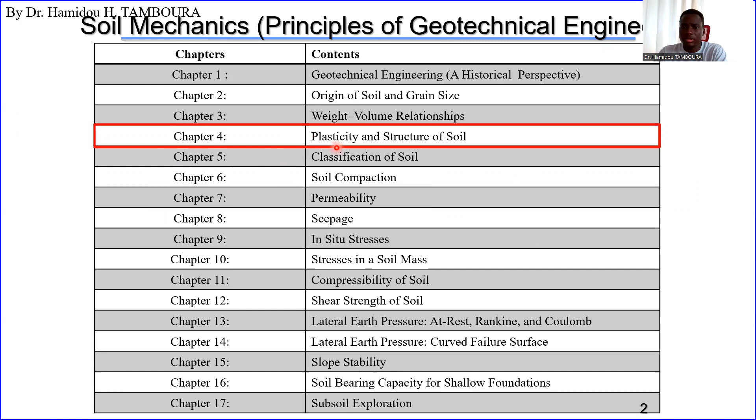In this video, we will start chapter number 4, which is about plasticity and structure of soil. These are the points we will discuss in this chapter, from introduction, point number 1, to point number 8, soil structure.

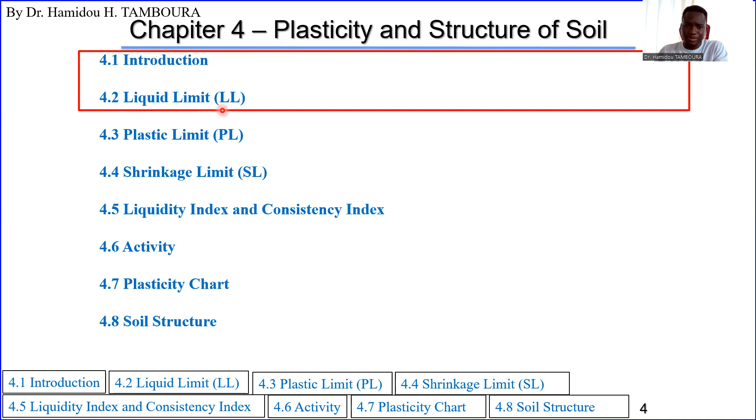For this precise video, we will talk about two points: first, the introduction, and second, liquid limit of soil. We will see what liquid limit is soon enough. Okay, introduction then.

Atterberg limit. Atterberg is the person who worked on this limit of consistency of soil. So he proposed some limits, which we will define very soon, to describe the amount of water of the soil that will change the state of the soil, like from solid to plastic, for example.

So these Atterberg limits are used to describe consistency of fine-grained soil.

If you remember, in the previous chapter we talked about relative density, and we said that relative density only concerns grains, like sand and gravel, this kind of soil. It doesn't concern fine grain, like clay.

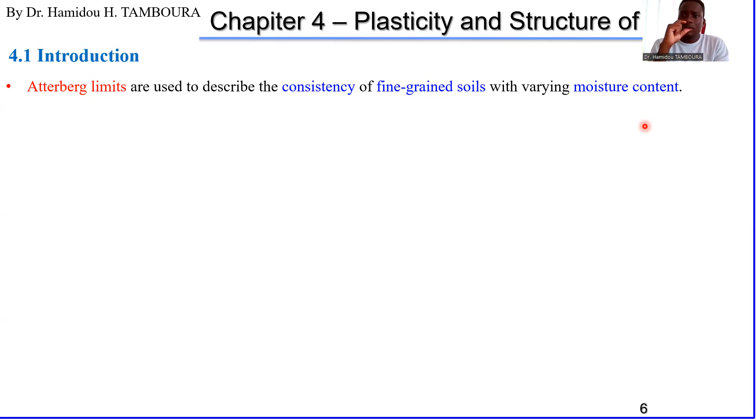Do you remember the formula of moisture content? It's weight of water divided by weight of soil, the solid particle, the solid part of the soil, because soil has 3 phases: solid, liquid which is water, and gas which is air. So weight of water divided by weight of the solid part of soil, that is the moisture content.

So this Atterberg limit includes the shrinkage limit, like solid to semi-solid. If you have a solid soil, like clay, and you add water, at a certain point this solid soil will change to semi-solid. So the limit between solid and semi-solid is the shrinkage limit.

And if you reach the semi-solid state of soil, and you keep adding water, you will reach plastic state. So this limit before reaching the plastic state of soil is called plastic limit.

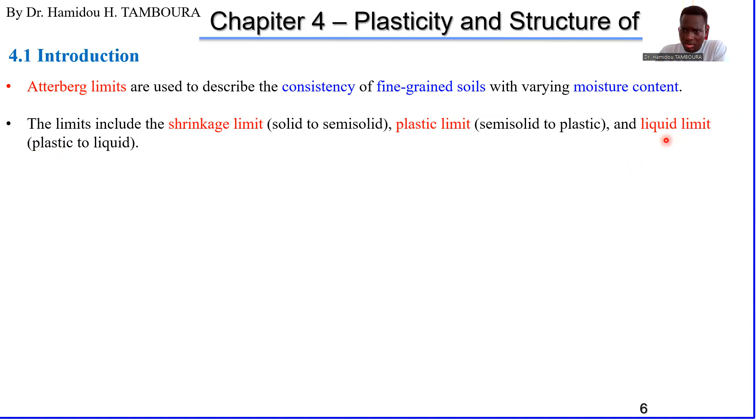And we have liquid limit. That liquid limit is the limit of plastic to liquid. So if you have plastic state of soil and you keep adding water, at a certain point your soil will become liquid. That is the liquid limit.

And if you keep adding water from semi-solid to plastic, you will have another limit, plastic limit, PL. And from plastic to liquid, you will have another limit, the liquid limit. So: solid, plastic, liquid.

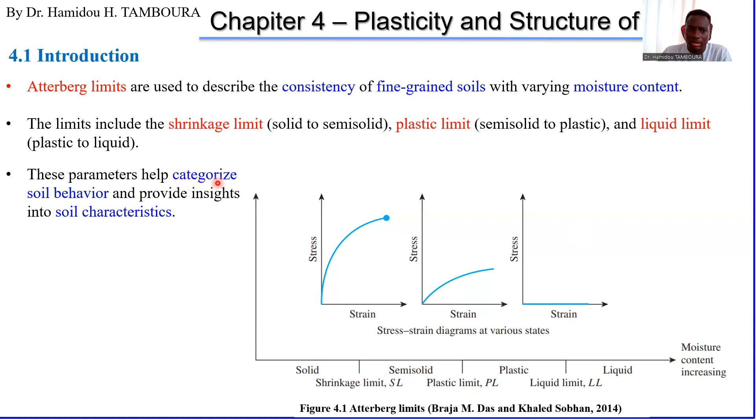So for those who don't understand what is stress and strain, we can explain that later. But this parameter called Atterberg limit helps to categorize soil behavior and provides good information about soil characteristics.

So in this chapter, we will try to explain how to determine this Atterberg limit, all of them, and how this Atterberg limit will also help us calculate some related geotechnical parameters like activity and liquidity index. We will talk about these two later. What is activity of soil? What is liquidity index of soil?

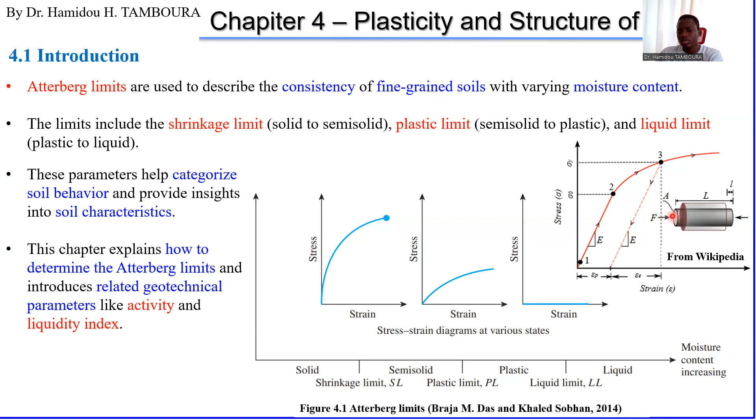So I was talking about definition of stress and strain. This figure can give us a definition of stress. If you have, for example, this original shape of a soil sample, this soil specimen, and you have this section A, which is the area of this soil, and F is the force applied on that area.

What we are calling stress is just the applied force divided by this area. This is just for those who don't understand yet what is stress, what is strain. So stress is just force divided by area.

The area on which the force is acting.

The strain is, when you apply force on the soil specimen or soil sample, the soil will deform. That deformation, small l, divided by the original length of the soil specimen, will give you the strain. So that is the definition of strain.

Now, the capacity of the soil to stand, to resist the stress, that is the strength of the soil.

As you can see here, for example, when the soil has this state, the soil has larger strength, because we need a large stress to cause a small strain. So this soil is strong.

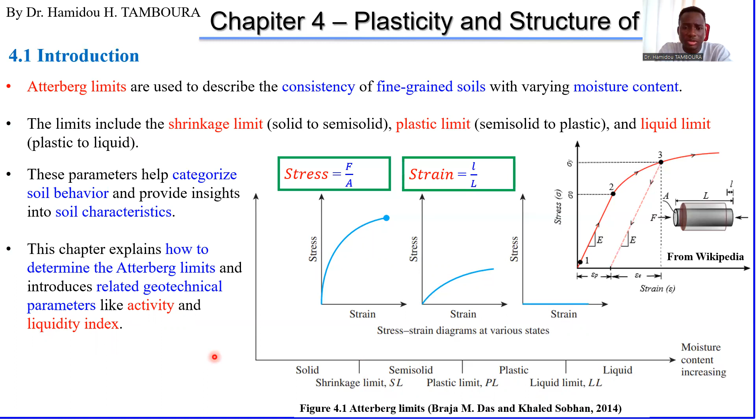Anyway, this chapter is about how to determine the liquid limit, plastic limit, and shrinkage limit, and how we can use these limits to determine the activity of the soil and the liquidity index of the soil. That is the objective of this chapter. Okay, that is the introduction.

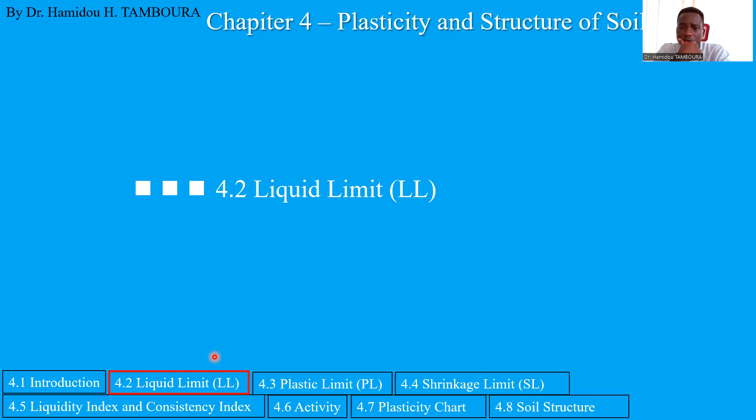Okay, let's move to the next section, section 2 of this chapter, which is about liquid limit. So the liquid limit...

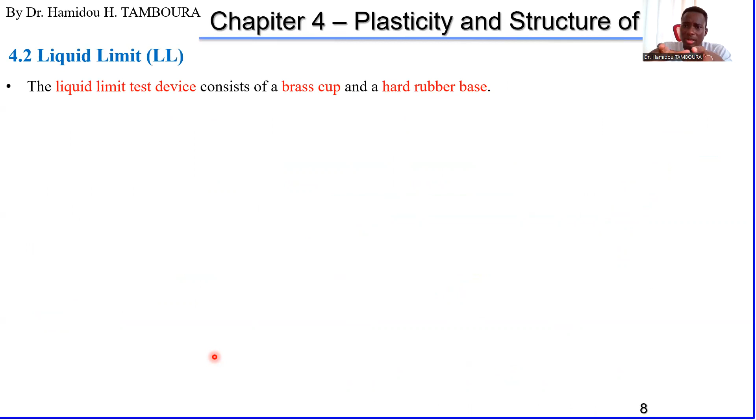is obtained by using a device, the liquid limit test device. It consists of a cup and a hard rubber base, something like that. This is the base, rubber base, and this is the cup.

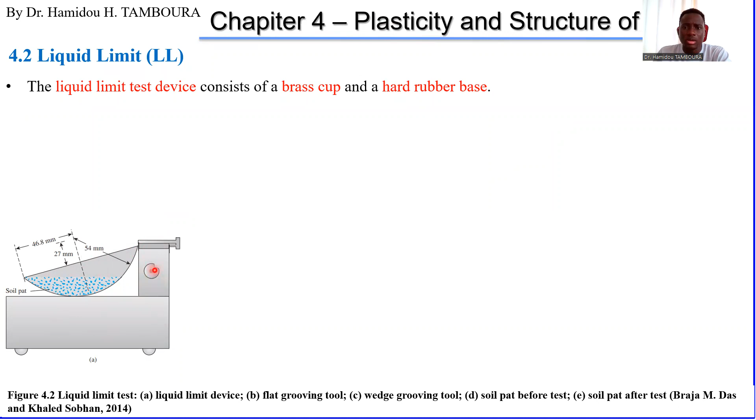So you put the soil in this cup to do the test. We will explain how to perform this test for liquid limit. There is also a handle around here, but this is just a drawing. This is me when I was a bachelor student - this is what I'm holding, this is the handle, the cup is here, and this is the base.

Okay, so to perform the test, the soil paste is placed in the cup. You put the soil in the cup. After placing the soil in the cup, you make a groove in the center of the soil.

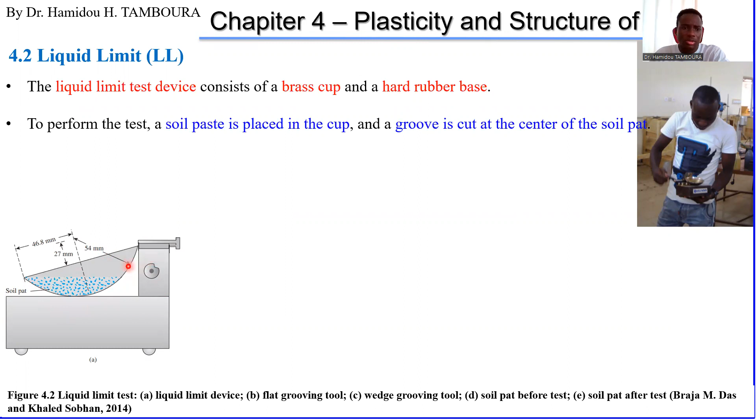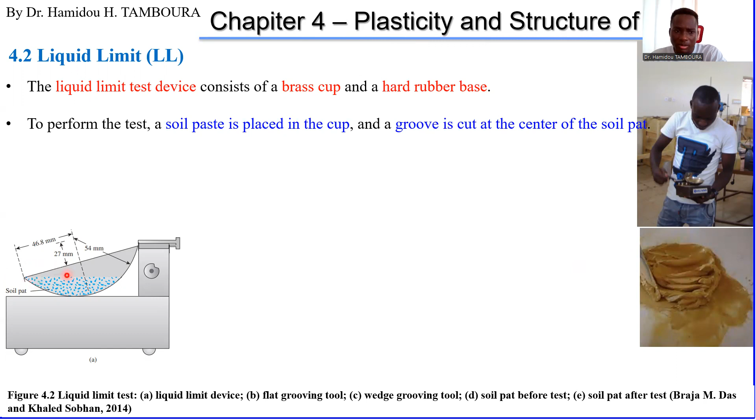Okay, so after making the groove, this is, for example, a photo I took in my lab. You see how the soil is - maybe it's like clay, like a paste. You put it in the cup, and you make the groove in the center of the soil.

These two are the tools for making the groove. There are two types, this type and this type.

After making the groove using this tool, you then lift the cup and drop it. That will cause the flow of the soil. By doing that - you see the handle I am holding here - if you turn the handle like this, it will lift and drop the cup. This part will drop on the base, the rubber base.

And by doing that, you will see the groove you made in the center of the soil will start closing, it will be something like that. At the beginning, you will have something like this, making this groove. This is, for example, a section view of this cup, and you can see the groove made by using this tool.

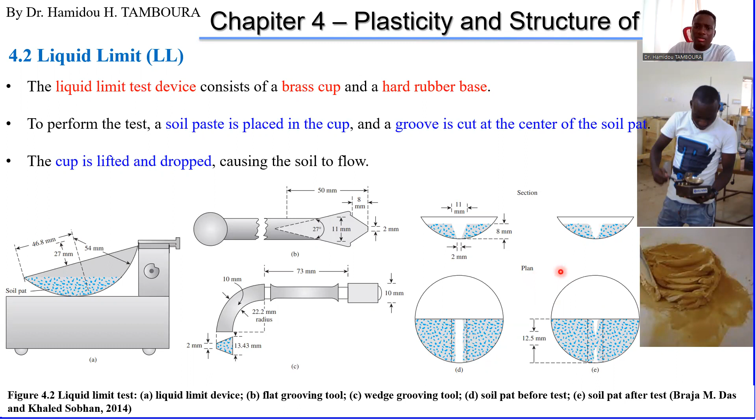After dropping many times, several times, the cup on the hard rubber base - okay, so what is now the liquid limit?

How do we find the liquid limit? Okay, so the soil water content, moisture content, required to close this distance of 12.5mm, just this distance, along the bottom of the groove after 25 blows, is defined as the liquid limit.

You see, for example, this soil here, this mixture of clay with water, we can determine the water content of this soil. You know the formula: weight of water divided by weight of solid particle. Okay, then...

If we use this soil, put it in the cup and drop, make the groove and drop it 25 times, 25 blows, 1, 2, 3, up to 25, and the groove closes, then the amount of water in this soil is the liquid limit. This is how it works.

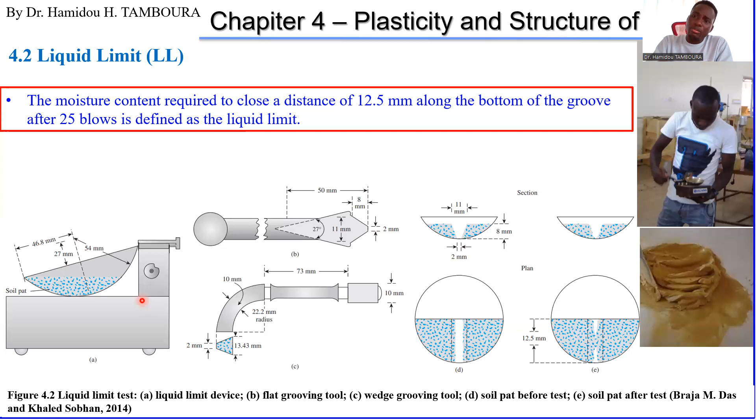So on the contrary, if the soil is too dry, you will drop the cup maybe over 30 times before it closes. The groove closes, means not much water. Soil is almost hard, almost solid.

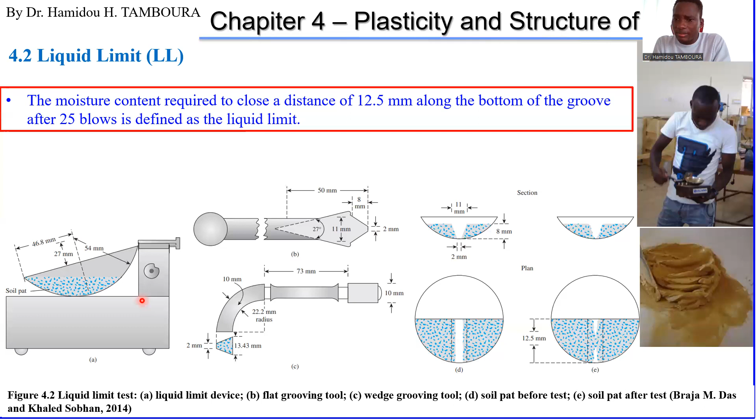Okay, so it's very difficult to make the mix of water and soil and have the water content that will close the groove at exactly 25 blows, dropping the cup 25 times. It's very difficult to obtain that at only once. So for that, people did a lot of tests. You have to do several tests before determining this.

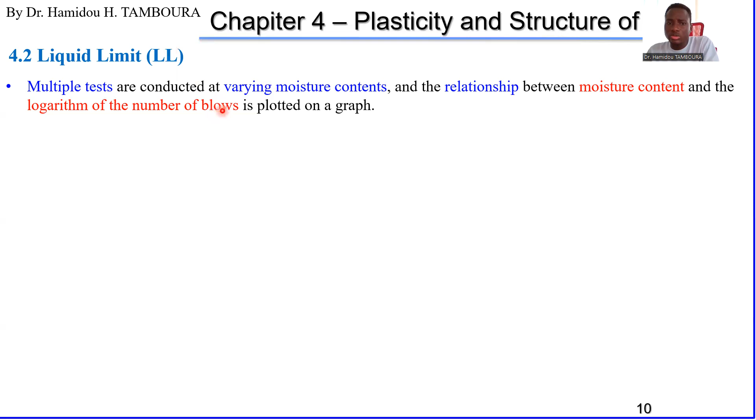So people did a lot of multiple tests and tried to estimate the relationship between the water content, moisture content, and the number of blows, actually logarithmically. And they proposed...

...this kind of method. So now in the lab, people are doing this every time. You do a lot of tests, at least 3 actually. Each point represents one test - 1 point, 2 point, 3, 4. So at least 3, and manage that of the 3 points, at least one has the N value higher than 25, and another one has the N value less than 25.

So this water content is the vertical axis, and the horizontal one is number of blows. But don't forget, here is log scale. After doing that, plotting the points, you can just draw this kind of curve.

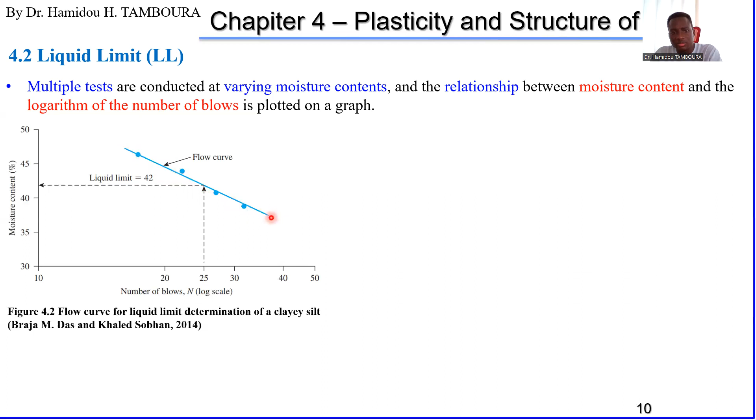So as I was saying, at least 3 tests for the same soil are conducted by changing the moisture content, the water content. You change the water content and you do the test. Or sometimes you just use the same soil - at the beginning you put too much water, and in time, the water will evaporate and the amount of water in the soil will decrease, and the soil will become little by little solid. So during the solidification of the soil, you will have at least once the liquid limit you are searching for.

No, at least three tests with varying the water content. So this curve - just an estimation. This curve is called the flow curve - the flow, how the soil will flow to close the groove made in the center.

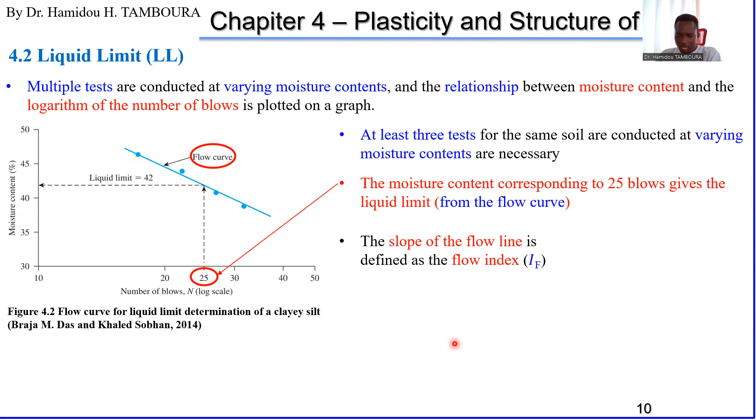The slope of this curve, this flow curve, is defined as the flow index, which can be obtained by this formula: IF equals W1 minus W2, divided by log of the ratio of N2 to N1. W1 and W2 here are the water content of soil in percentage. N1 and N2 are the number of blows corresponding to W1 and W2.

Here is W2, okay, it's just a mistake. So as you can see here, the W1 and W2 are exchanged so that we can obtain a positive value, because as you can see, the slope of this curve is negative.

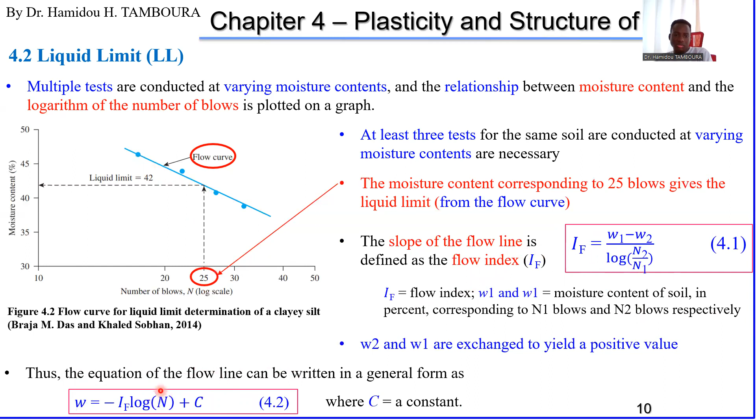So after that, then we can say that the equation for the flow line, this line, can be obtained with this relation: water content is equal to minus IF, IF is the index, the slope, the flow index, log N plus C, and C is just a constant.

I will just skip this figure here. We will use it again. So,

US Army Corps of Engineers propose an empirical formula to determine the liquid limit. They say liquid limit is equal to water content Wn, times the factor of the number of blows N divided by 25, raised to the power tangent beta. N is the number of blows that will close the groove.

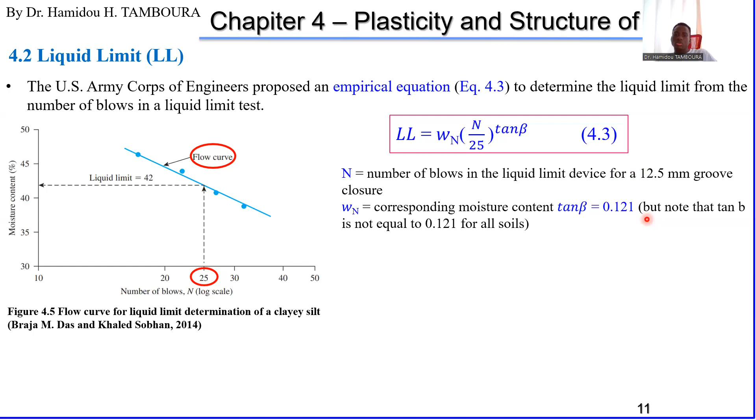And Wn is the water content corresponding to that number of blows. The tangent beta is estimated to be 0.121. But this value of tangent beta is not true for all soils. Some soils, this value doesn't work.

So this equation is working for N value between 20 and 30. And the formula is known as the 1-point method and is adopted by American standard.

This means that you do only one test. By doing only one test, you can use this formula to obtain the liquid limit, because previously you needed to do multiple tests before you determine your liquid limit. By using this formula, you need only one test. Only 1 point is necessary.

So you put water in the soil, you know the amount of water you used, meaning you know the water content, and you do the test. The number of blows you obtain, if it falls between 20 and 30, then it's good. You can use this formula directly to obtain the liquid limit using the water content of the test and the number of blows you have obtained.

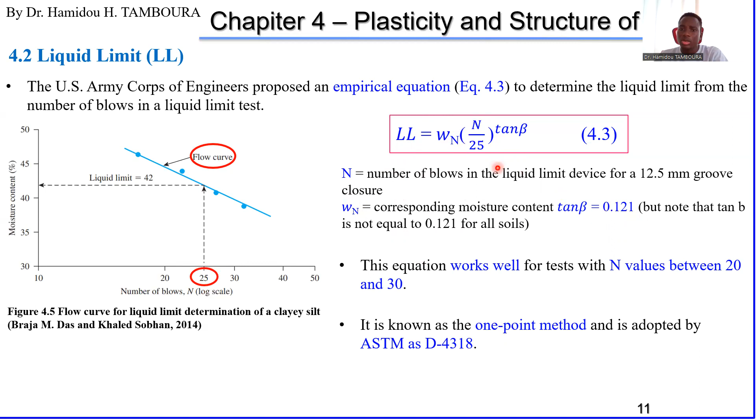And by using this tangent beta value of 0.121, you can obtain easily your liquid limit. This is the value of all this part, N over 25 raised to power tangent beta, and we said tangent beta is 0.121. So according to the number of blows,

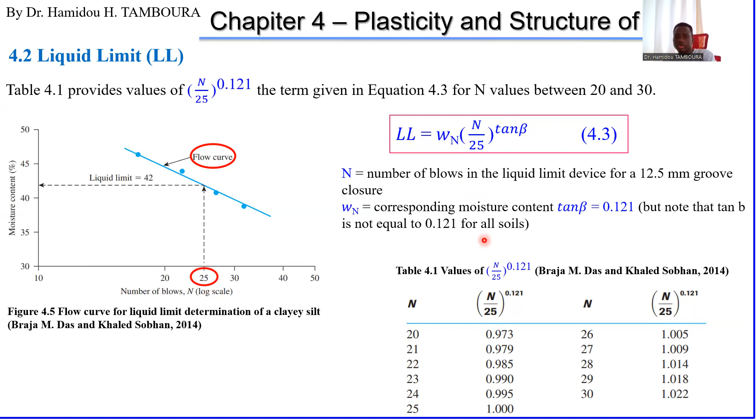this value can be used from 20 to 30. So you can use this table by knowing the water content, meaning the amount of water you have used, and knowing the number of blows. You can easily just use this table, take this value which corresponds to all this part of the equation, and multiply it by your water content. You will get your liquid limit.

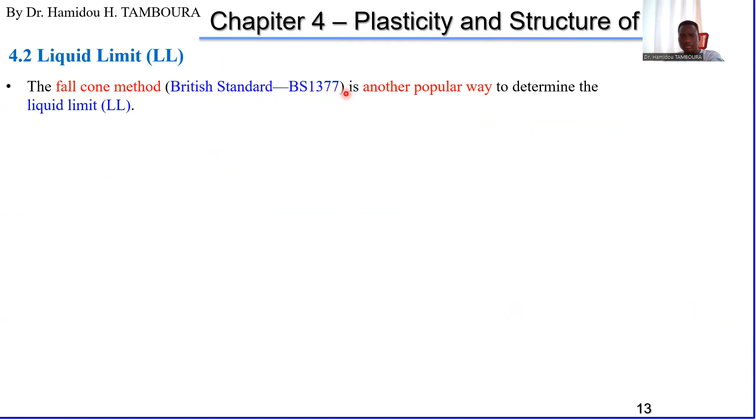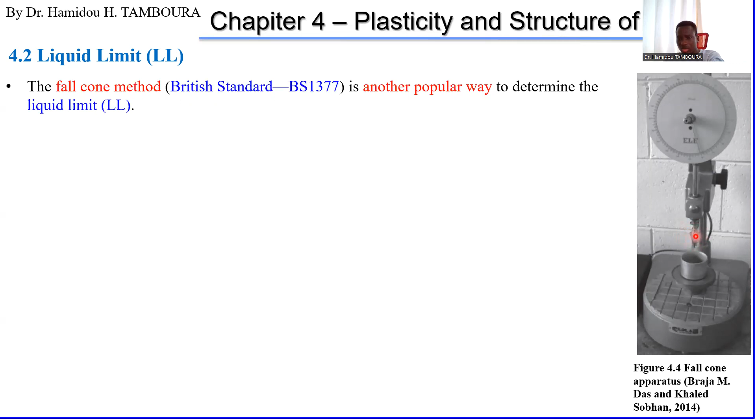Another method used to determine liquid limit is the fall cone method, which is adopted by British standard. That method is also another popular method using this device. So you see a cone, this is a cone, and we drop this cone into the soil sample.

In this test, the liquid limit is defined as the water content at which a standard cone, with an angle of 30 degrees and weight of 0.78 Newton, will penetrate 20 millimeters into the soil in 5 seconds after dropping the cone.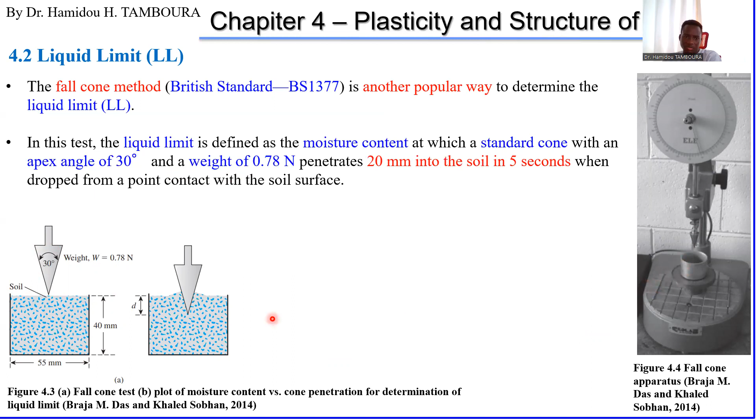This is the drawing of this cone. The soil surface is here, and this cup has 40 millimeters inside. We just want a penetration of 20 millimeters. As in the previous method we wanted 25 blows, here D is 20 millimeter penetration. This D, from the top to the head of the cone, needs to be 20 millimeters.

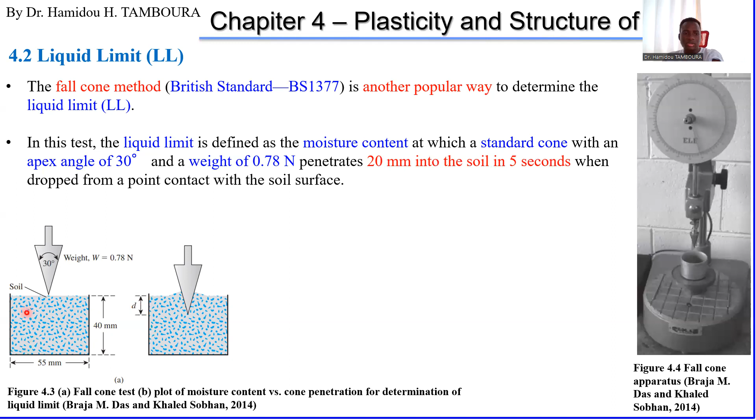Of course, you can already guess that if the soil is too wet, with too much water, the cone will penetrate too much, over 20 millimeters. And if the soil is too dry, the penetration will be less than 20 millimeters. So this is just about the geometry of the apparatus.

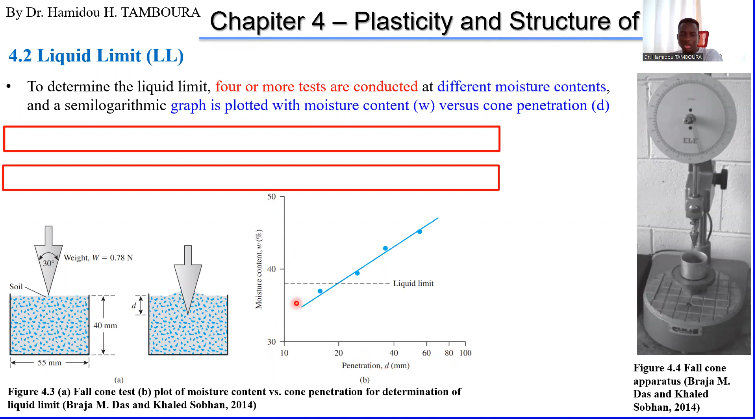So how do we define it? To determine the liquid limit, at least 4 or more tests are conducted, changing the water content. If we plot the graph, it will be something like this: penetration distance D on the x-axis, and water content on the y-axis. The liquid limit is the one that gives us penetration of 20.

So the liquid limit corresponds to the moisture content, water content, when D is 20 millimeters. So if you go here, up, and across here, you will get the moisture content.

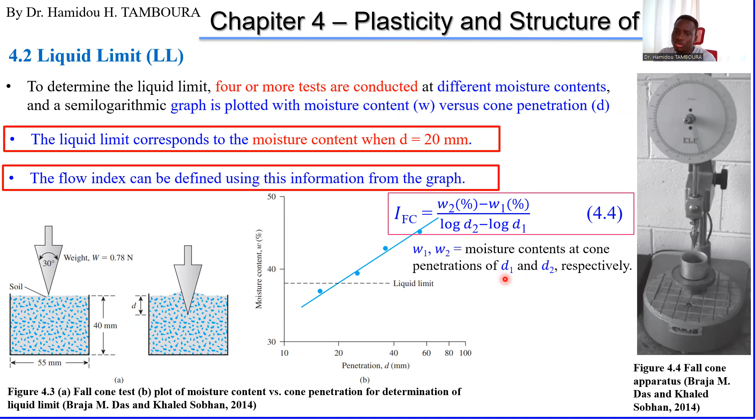The flow index, as we defined in the previous method, can also be found from this graph in this method. The formula for this flow index is given by this equation: W2 minus W1, divided by log of D2 minus log of D1. W1 and W2 are moisture content at the cone penetration distances D1 and D2 respectively.